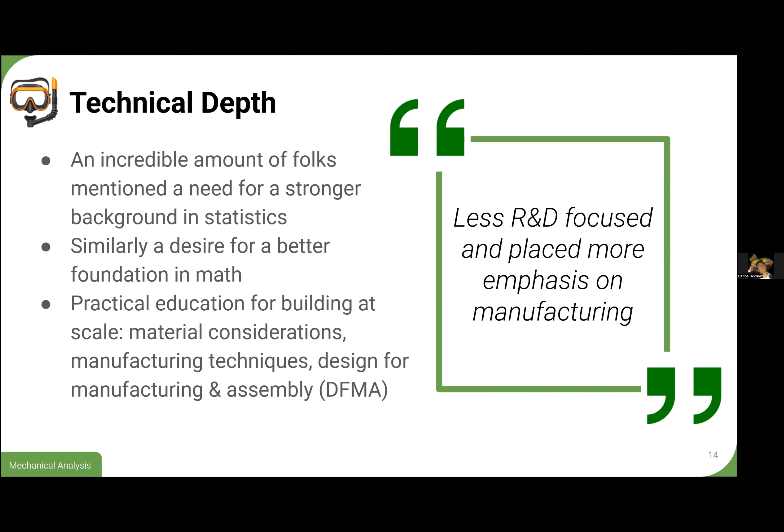Another thing was similarly more practical skills, specifically for mechanical engineering. So people time and time again were talking about the need for understanding how to make things at scale. How do we make something in the thousands to the 10,000s and so on? And how do I actually take my part and understand it when it comes to all the different manufacturing techniques?

A lot of people talking about how 3D printing maybe isn't representative of the real world when it comes to rapid prototyping, and that I need to understand how to work with sheet metal instead and other aspects that aren't really covered when I'm doing something like PIE.

And also it's interesting to hear a lot of people want to see some more stuff on the business side, that they felt wasn't really understood or covered. Or how do I even price this thing? How do I even make something that is feasible where I'm making my tens of thousands, but actually making some amount of profit to pay whoever I'm working for or pay my workers.

And also, which was surprising to me, I guess, was just education on skills in the workplace. Specifically, a lot of people touched on the need for, how do I negotiate a salary? How do I do workplace interactions? There seemed to be a desire for that in the classroom. I don't know if that's possible, but I think it's definitely interesting to see that is an aspect that I wasn't even considering myself.

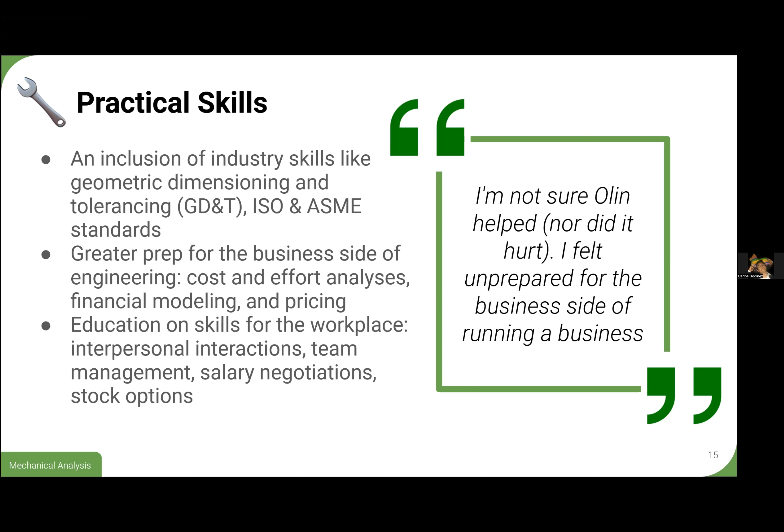One positive note is it was really interesting to see what people noted as Olin's edge, what did it provide them and prep them for that they felt put them a leg up above their coworkers. I think notably, people really touched on the idea of design courses being strong at Olin, design thinking, systems thinking. The idea that UOCD and SCOPE really served them was something that I saw over and over again.

UOCD, I think, was pretty consistent, with a lot of people wanting to keep and maintain it in the curriculum as an essential part of how they thought about their engineering curriculum. And yeah, just the ability to context switch was something that people were noting. The idea that they could do the grindy, how do I get this to work? How do I figure out all the steps to get this to actual production?

But also look at it from a system perspective and think, how does this interact with other aspects of the company, ecologically, psychologically, all the different ways that this goes beyond the scope of just engineering. And that I am not just looking at this very small aspect of what this project is.

And I think in a similar way, people are noting the need for a change in mindset. I think we see that in all the courses that we're now taking, in some of the core ME classes, as we transition to this new curriculum: how do we do something that actually is useful instead of just another piece of plastic that's added to landfills? And how do we increase or maintain that mindset in a learning environment where it's hard to actually provide that impact?

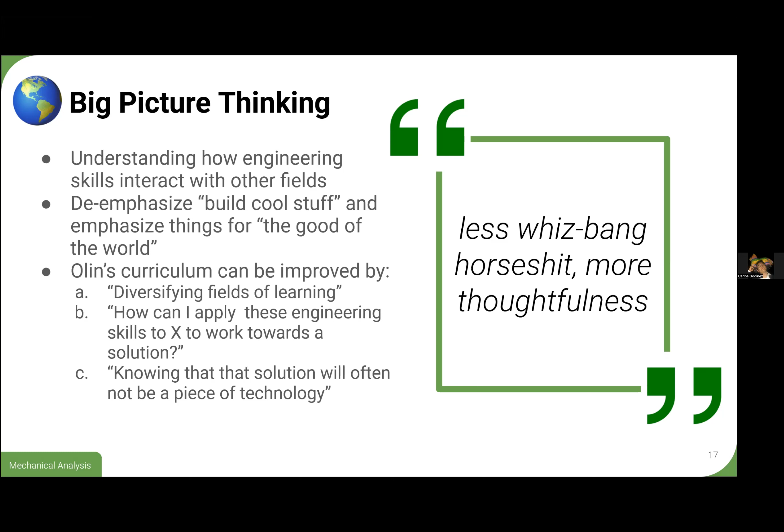I thought this quote of less whiz-bang horseshit, more thoughtfulness, were fantastic. But there are definitely a lot of people that really wish they had a way to consider these contexts and actually think about it when you're being told it, I guess. And this is something we're hoping to touch on in some ways. This is something that Paige has been working really hard on, incorporating safety and ethics, talking with different alumni, industry professionals, like Sarah Hendren. So this is at least one of the facets that we're hoping to approach.

And then the big things are, what is actually good, and what should we do from year to year before we start making a bunch of changes. And I think some of these are self-explanatory, that Olin really does give an emphasis on taking accountability for your own learning and taking charge of that. And we are more of a breadth school when it comes to what you're learning instead of technical depth, and we expose you to a bunch of different topics.

And this course is similar in that way, where there is a wide variety of making tools and topics that are incorporated into machine elements. We're going to give you a quick introduction to each of these topics every class. But it's not going to be the full breadth of it; it's going to give you the verbiage and the things to look up later on, of how you could actually learn this and really use it in your career. But again, it's not necessarily a depth course in some ways.

And these are just a couple quotes that I really enjoyed. I think the first was definitely more intense than some of the other stuff on the survey, but I'll just read it aloud. It's saying, mechanical engineering in the real world isn't 3D printing a plastic doohickey on a MakerBot. It's choosing manufacturing methods, choosing materials, it's doing tolerance stacks, and it's doing drawings. And it seemed like a handful of people really felt that way, that they really wanted to know more about the real world of engineering that we just can't have done, I guess.

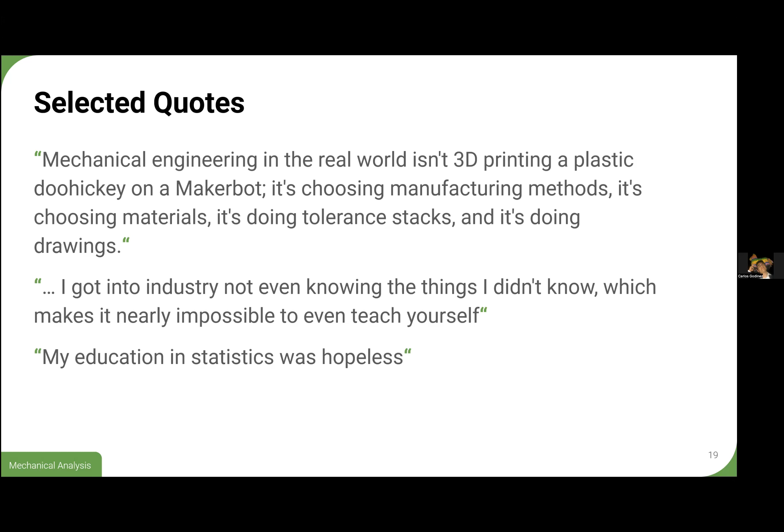And then also this thing was really, really common. I showed this presentation to Zach, and he also vehemently agreed that we have a lot of stats that's missing. So that's something we're also hoping to touch on. We're trying to ingrain some of the stuff that Zach has touched on in PDOs, and he did this workshop this past summer where he taught data science to engineers. So I'm getting a lot of good feedback on how to touch on the topic of statistics in this course. But yeah, this was in the past one.

But largely, I just wanted to let you know that we're trying to look beyond ourselves, beyond our own experiences, to provide a course that actually touches on what people want in their ME career, what people actually feel like they needed that Olin didn't provide. And I didn't want to keep it all in our heads so that you didn't realize the rationale of why we're choosing these things, and so that it's a two-way trust that we are trying to do things that are effective and useful, and that this isn't us being self-serving and just trying to teach a course that's what we would learn. But yeah, that's it.

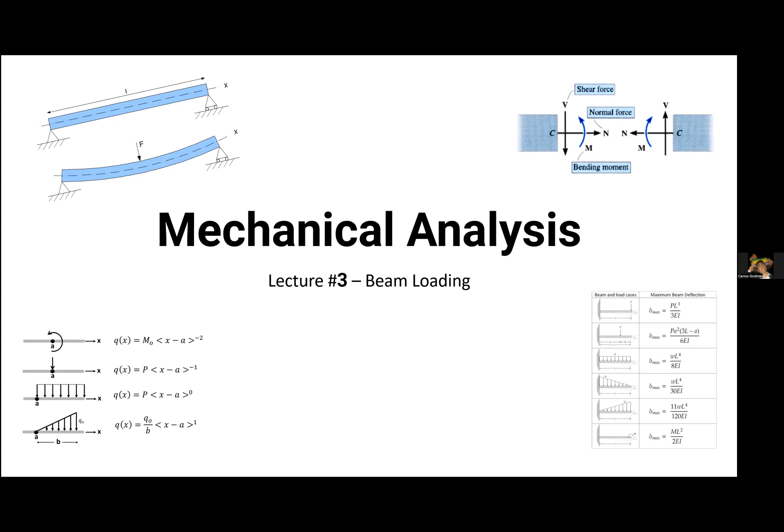What you can do is take the known solutions for those and just superimpose them on top of each other. Say you have a cantilever beam that's uniformly loaded in one direction, and then there's just one random point load or moment somewhere. You can take the solutions of the known cases and then just add them together to get both the stresses and deflections. So it's a pretty useful tool. It has some extent, but I won't really touch on it. It's something useful just to know that you have in your back pocket if you ever need it.

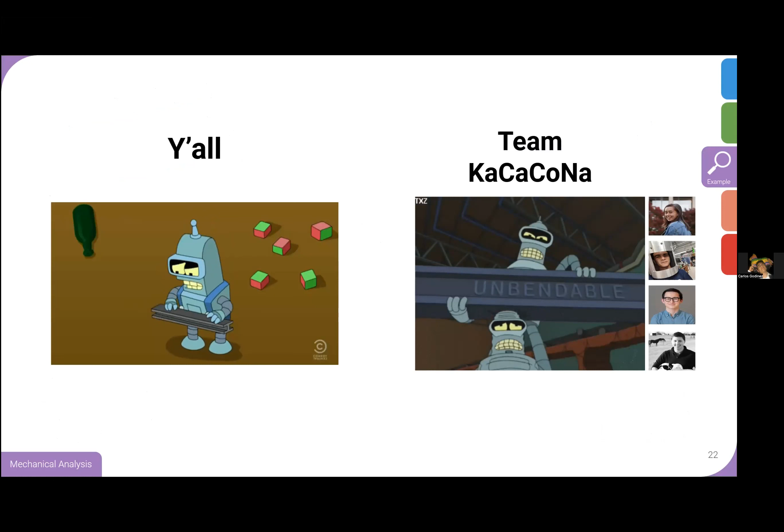So basically beam bending now. KaCaCoNa was the name that Rob and Daniela gave us for the teaching team. We're going to show you our secret beam bending ways.

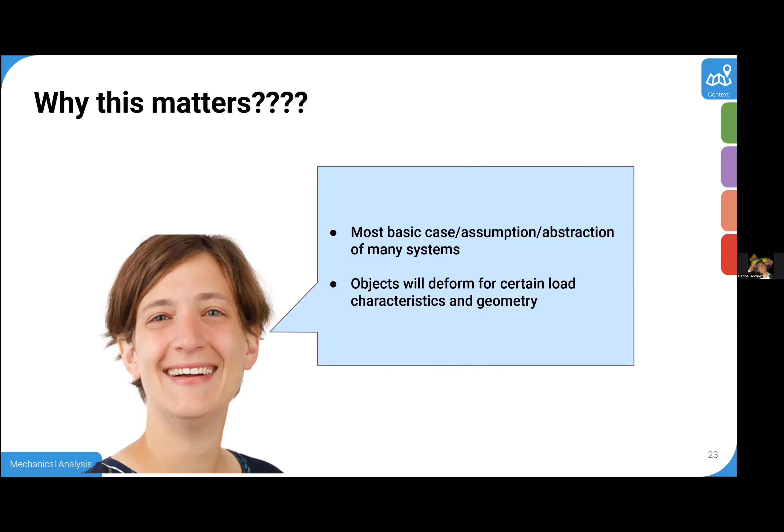Why beam bending matters is that it's really the most basic assumption. If you have a system like some shaft or some I-beam for a known load condition and geometry of a certain object, you can make really good assumptions on how that thing will deflect. All of this is within the realm of small deflection. What is small deflection? Ask Chris Lee. Less than 10%. I didn't know that. Thank you. But yeah.

Like I said, why this matters is that a lot of these engineering problems can be abstracted to just simple beam bending problems. An example we'll see later in the class is that you can treat a tooth on a gear essentially as a cantilever beam with a fixed joint right there. All gears are just spinning levers, and the actual teeth are the beam stemming from it.

Not to get too far ahead of ourselves, but if you remember back to Mech Solids, we'll get to this a little later. Basic beam bending goes MC over I. That goes into a very conservative but very commonly used stress on gear teeth called the Lewis bending equations. And the form factor is very similar.

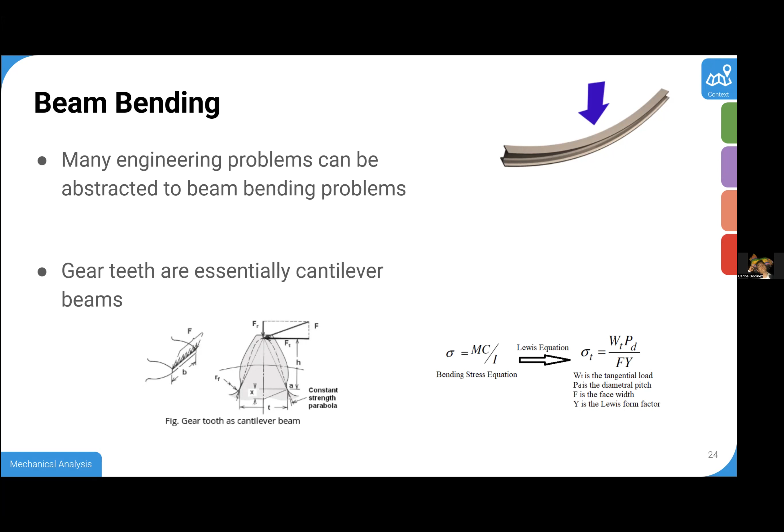Deriving the actual beam bending assumptions and deflections, we're not going to do that in this class. Brian actually has a pretty good video that I do like on it, and so those are in the slides. There are a ton of other resources, including on the content review page and the Notion that was sent to you guys a couple weeks ago. And those of you in Mech Solids, in probably about 4 weeks or something, are going to do these derivations by hand. We're going to skip past that. We're just going to get to: here's the final equation, and here's how to understand how to use it or what it's for.

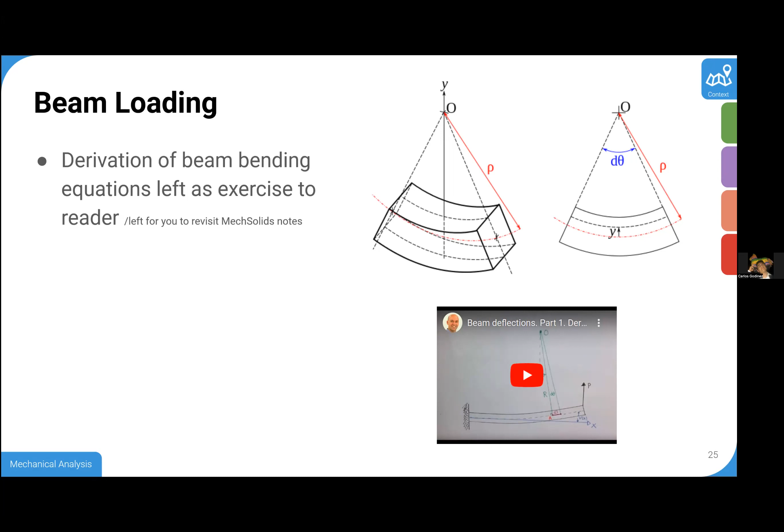Oh, no, don't play that video.

There we go. Okay, so when you have a beam, what we're saying is a beam of constant cross section, and then there's some supports acting on it. When you put loading on that beam, non-uniform loading, it's going to result both in shear and moment. For those not familiar, V is commonly used to denote shear force, and M is commonly used to denote a moment acting upon a beam.

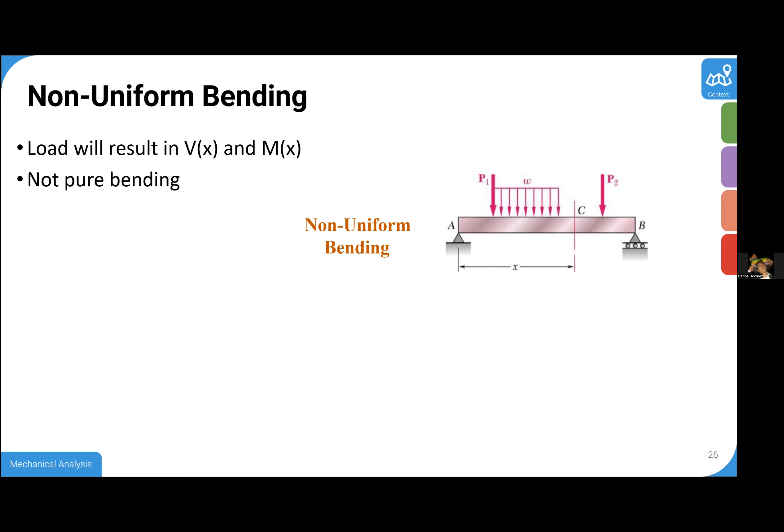When you have non-uniform loading, which is going to be the case almost all the time, the beam itself is not in pure bending. What is pure bending? Pure bending is when you have no shear acting upon your beam and you have just a pure bend of it. So if you look at the top, there is no sliding of things. You can think about shear force as a force on your stress tensor. Shear force is going to cause a change in shape.

Very similar for beams, you can think about it as having axes and grains running along it, and you can see it slide. I don't have it with me, but there are videos online where you take a bunch of strips, hold down both ends and bend it downwards, and you'll see these fibers slide together. So that's the difference between pure bending versus shear.

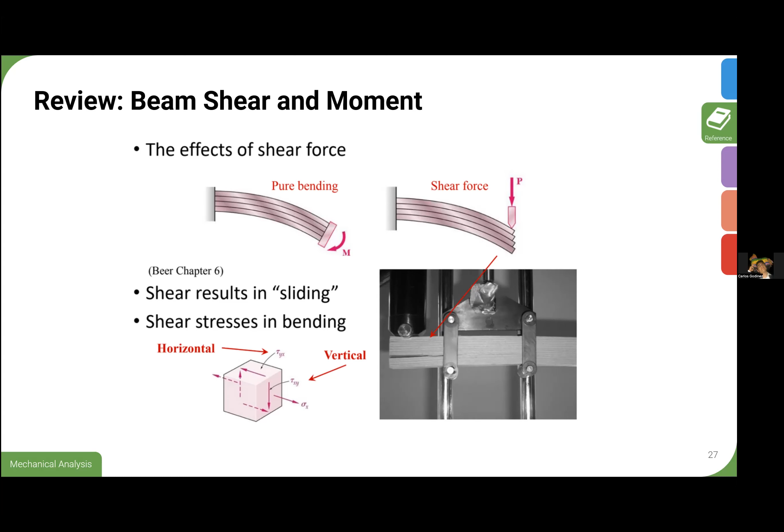However, these equations, even though it's an abstraction, are still very useful. Another way to drive that point home is if you were to look at the actual cross section right here, there should be no change in angle when you have pure bending.

Now is also a good time to talk about bending convention. We'll talk about shear convention in just a second. When you're talking about sign convention for bending, if your beam is bending upwards in your up direction, whatever that might be, that is considered a positive bending moment. If it's bending downwards, like making a frowny face, that's considered a negative bending moment. It's really easy to get tripped up on this, but it just takes some practice.

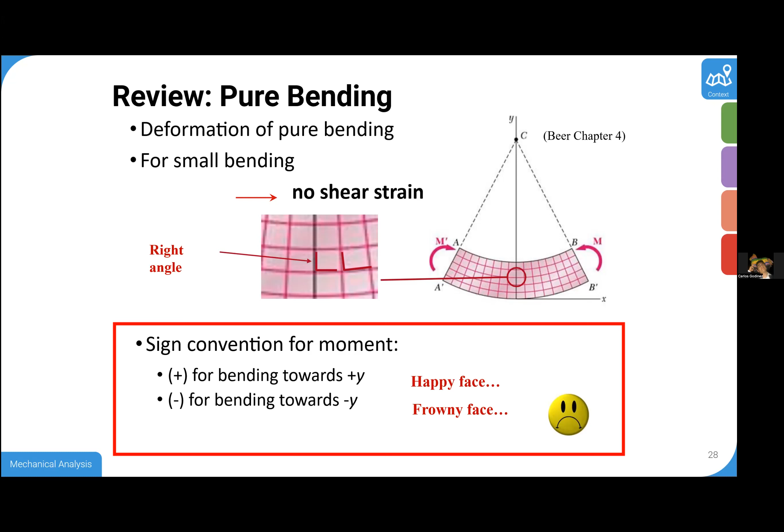I'm going to talk about how you go from shear to moment and loading. The slide's not super clear; I should have put this part right at the top, so focus on this. Right here, the distributed load is usually referred to as W. That's your load, your force applied or your loading distribution. It's flipped in the negative direction.

So it's kind of confusing, but Q of X is your actual loading condition: you have a distributed load, point moments, a point force acting on something. Conventional wisdom says, okay, I have a downward force right here. That's your loading curve. If you go back to the equations and derive where this comes from, small radius, change in curvature, it makes more sense to make Q act in the upward direction, opposite of your loading function.

The reason we have that is because the most classical way to solve beam bending equations with deflection is the double integration method. Basically, your Q function, your loading, is the derivative of your shear, which is then the double derivative of your moment. We have more slides to drive that home. But the biggest thing is to put in your mind that if I take the derivative of my moment, I get my shear. If I take the derivative of my shear, I go back to my loading function.

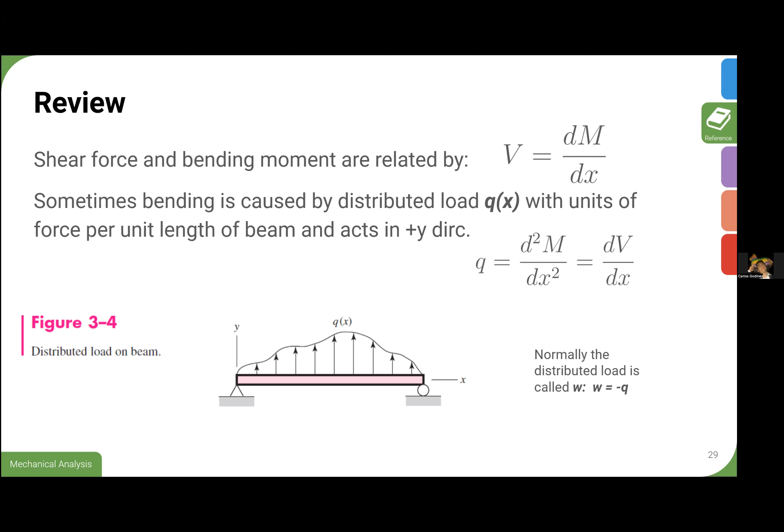When you apply a force on a beam, like I said, it causes both a shearing force and a bending moment. To drive that home, it's better written out right here. The loading function is the double derivative of your moment and the single derivative of your shear force. If you want to put it in the actual calculus terms, it's written out right here, and this is what you'll use for doing double integration methods.

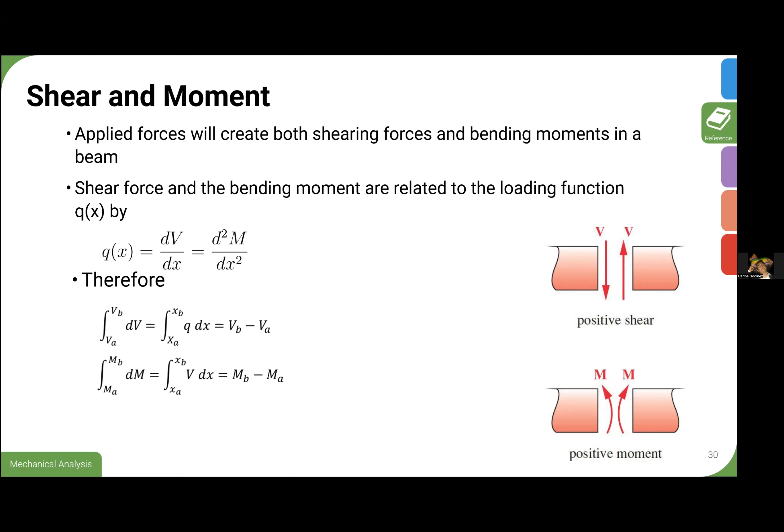We're there now. Let's talk about shear and moment diagrams. I always mix it up. So you remember how, when we talk about internal stresses and force, if I take some body and load it, and then I make an imaginary line and cut through an object, there has to be some sort of internal shear or internal force that holds the object together. You can do the same exact thing with a beam.

So if I have a beam right here with a simple support here and a simple support there, and I want to figure out the shear and the moment throughout this entire beam, there is nothing stopping me from making an imaginary cut at whatever arbitrary place I want, and then asking myself, with my known forces and my reaction forces here, what is both the shear and the moment acting on this imaginary line?

Does anyone have any issues with that? That sounds good? No problems? Cool.

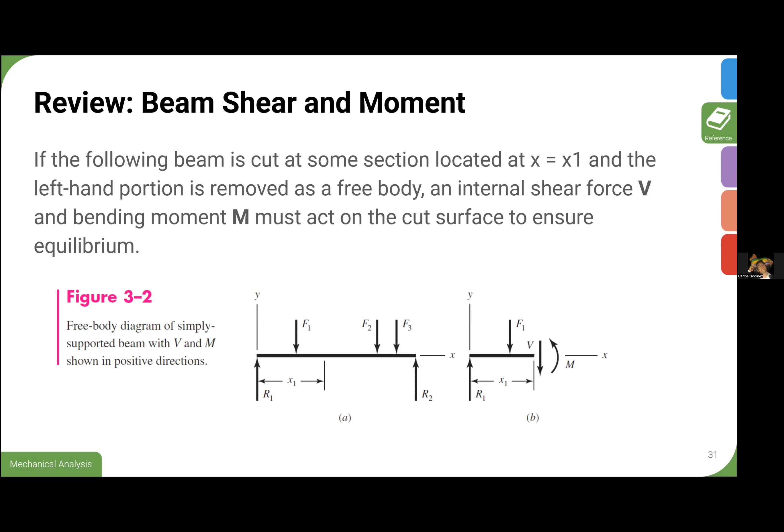Before I start analyzing that, we need to talk about the sign convention for my shear and my bending moments. Like I said, it can be very difficult. It took me a very long time to do this. But the positive and negative bending moment is pretty simple to remember. If it causes a smiley face, it's a positive bending moment. If it causes a frowny face, that's a negative bending moment.

Shear gets a little confusing, especially when you couple it with how we draw both shear and moment acting upon the imaginary cut face. The way I always think about it is, if I am going from left to right, which in most cases you will be, I take my left face, and say this is a fixed end right here. Is my shear force going to be pushing it down or pushing it up? If it's pushing it down, that's trying to force it into that smiley face, so that is a positive shear. Ignore this second half, but in this section right here, even though my arrow is pointing down, that is considered a positive shear force.

Could you explain why the arrows on the diagram are positive here, with the specific reactions? Sorry, what? Okay. So this diagram, the way I like to think about it, and some people find it helpful, is that the shear still causes a reaction moment. And so that is causing it to bend in that positive, smiley face position.

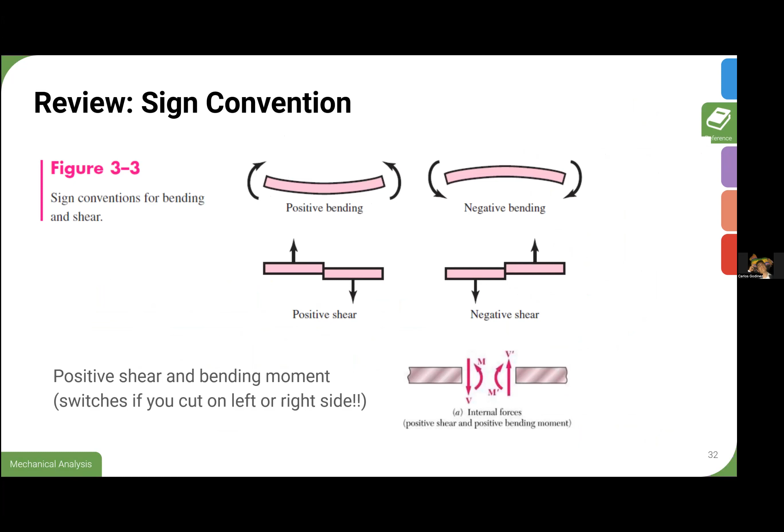When I make my cut on the, oops, don't look. When I make my cut on the left side, so pretend like, ignore this section right here. When I make my cut on the right side, and sometimes it's necessary depending on the beam bending problem that you're doing, you want to flip your arrows, you flip the direction of your cuts.

Can you ever have a positive bending moment, but then sort of a negative shear? Can you ever have the opposite pair? Or can you just determine the direction of the shear just based on the direction of the bending?

I believe you can. If you have, I'd have to think more about that, right? So in the meantime, just assume no, that you should solve for both of them and do your due diligence. But I'm trying to think of a case where you would have opposite shear. And then instead, if you had moments applied on your beam instead of forces, you still have. Yeah. It would be the same. That's good.

Okay, so afterwards, this is what your actual... Carlos. Oh, sorry. Just a question on the previous one. What information does the second diagram give you as compared to the first, and the fourth as compared to the third?

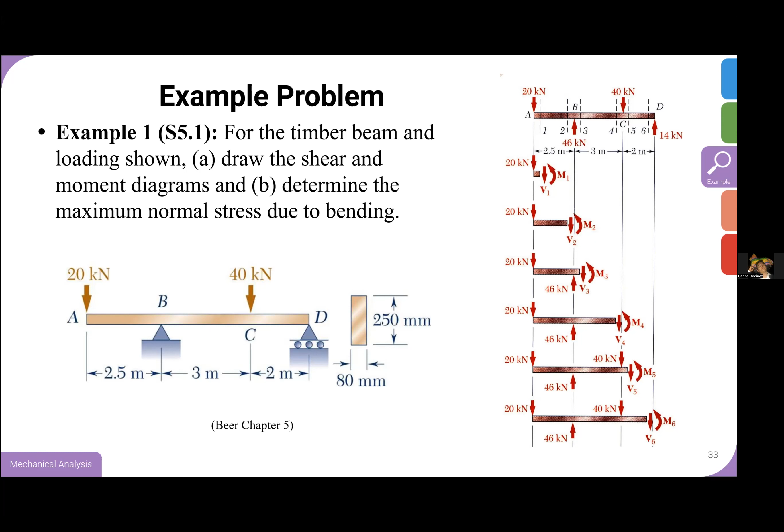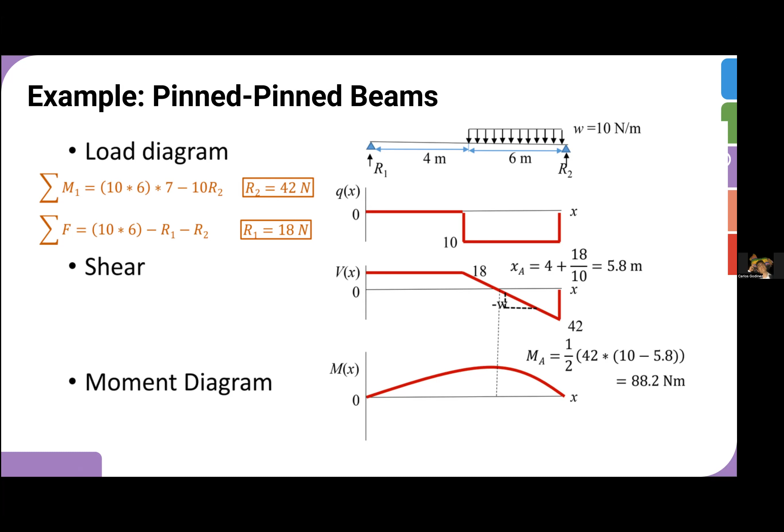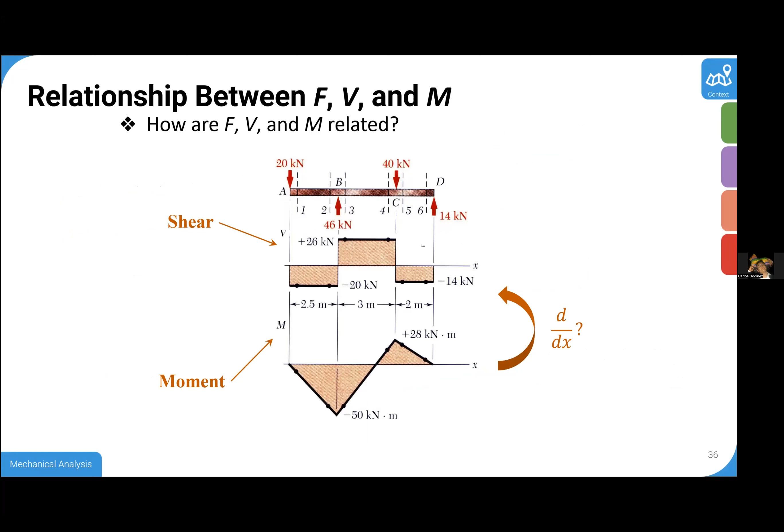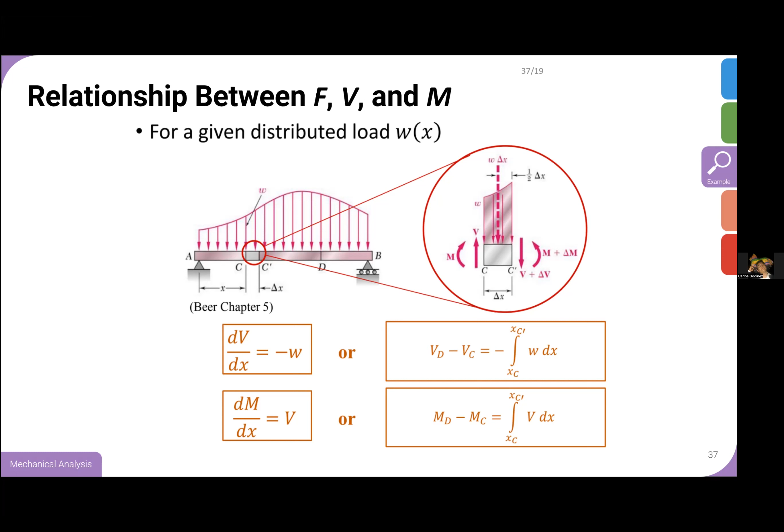Okay. Once again, just driving that point home where it is the derivative of that, and actually go back one, this is the derivative of that. Same thing, double integration method to get between shear and moment. Here, I wanted to have y'all go through the in-class example and spend a few minutes making your own shear moment diagram.

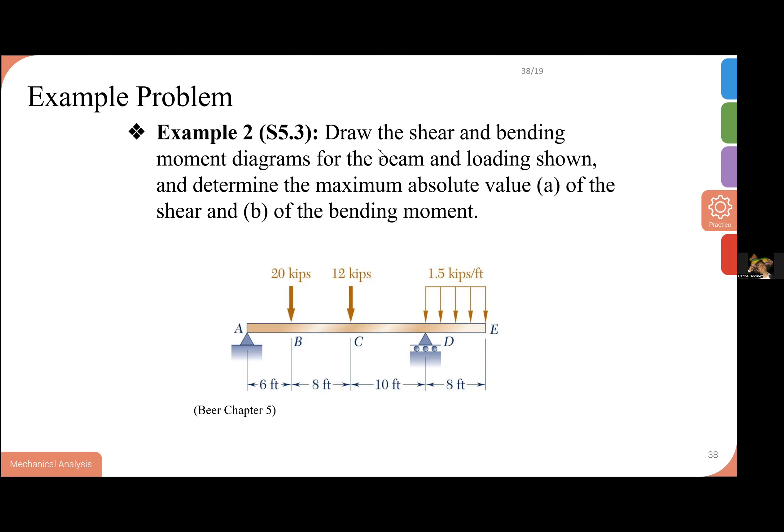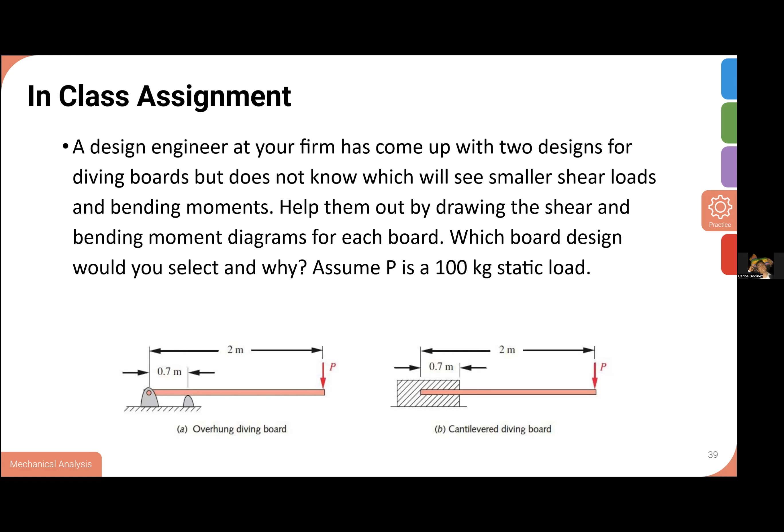Okay, so let's actually think about this, because you have kind of two approximations to it. So for this first one here, because we don't have a fixed end for this 0.7 meters right here, we're going to experience some shear stresses acting in the middle. So this doesn't look too bad. We haven't done the actual forces. I just assumed like a 100 kilogram force acting upon here. And this is what the shear moment diagram would look like for a case like this.

Interestingly enough, for the fixed end that we have here, it actually is going to result in less force. The reason for that is that for this fixed end right here, the moment isn't going to be applied until the very end here. And so that is actually going to lead to less stress and less forces acting across the beam, because you're effectively eliminating this first section right here. There's no forces acting across it, and the moment only acts until you're right here. So just something to keep in your mind when you're trying to build intuition for what beam arrangement is going to have more forces inside it.

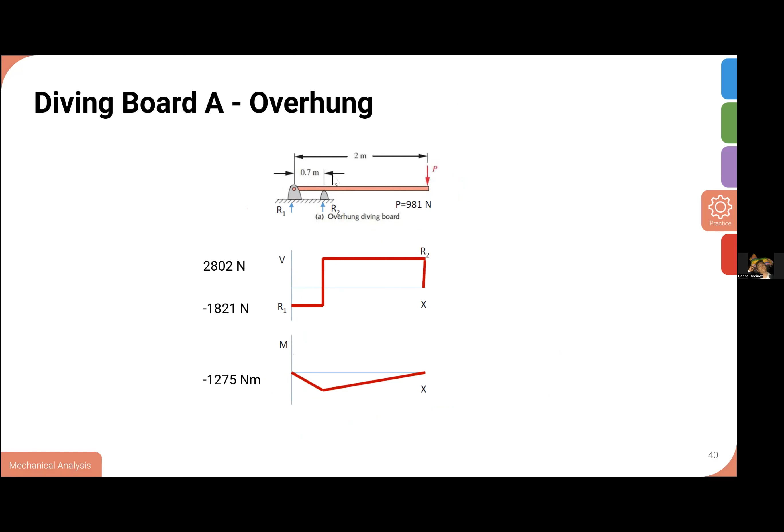Last final slides. This is, yes, sorry, has a higher shear, yeah, value. Yeah, so the actual shear, if we do the math for this, the shear acting across this section right here is, number one, you're going to have a really high negative shear here, and then you're going to have a higher shear in this section. You can flip back and forth in the notes to see it, but right here we have a fixed end, and so we just have a fixed moment right there.

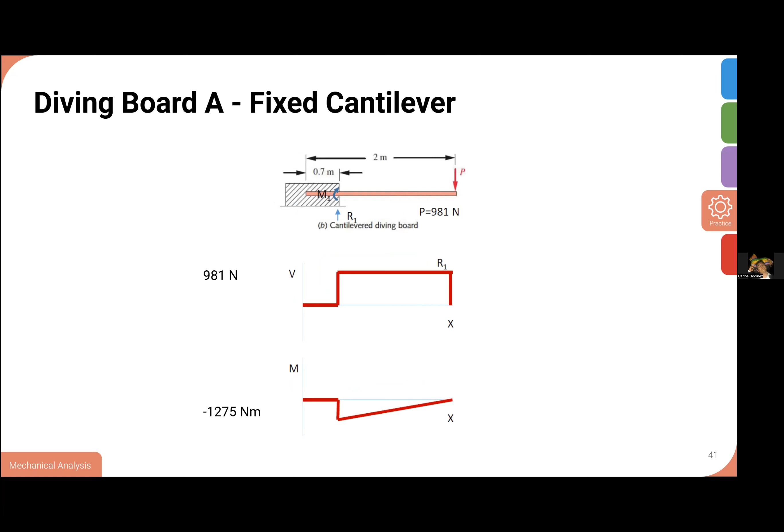And another way to think about it is that this arrangement can't provide a moment, it has to provide a force couple. Versus this arrangement, it can provide a moment because it's a fixed end. So it makes it more simple to actually just do the free body diagram. Okay, this is speed running through what is usually a 30-minute lecture in mechanics of solids. So you don't have to believe me. It's probably useful if you believe me.

But when you actually start caring about the stresses and the bending stress acting across a beam, and you're considering the geometry, basically you have two moments. The moment acting across the beam is going to be equivalent to your Young's modulus E of whatever material it is, multiplied by I, we'll get to I in just a second, divided by your radius of curvature. Which way is it? Yeah, radius of curvature. The radius of curvature, if you go through the Brian Story video, or remember back in your mechanics of solids notes, or you'll experience it in just a few weeks.

Basically, if you have a bending beam, for every point on that, you can draw a dot and see what the radius is, like if you imagine your beam was now a full complete circle. When you do a bunch of calculus and make some approximations, the bending stress dependent on the normal forces acting in the direction of the beam, you can approximate as the moment at whatever point you are along your beam, multiplied by y, which is the distance from your neutral axis, divided by I. And I is your second moment of inertia.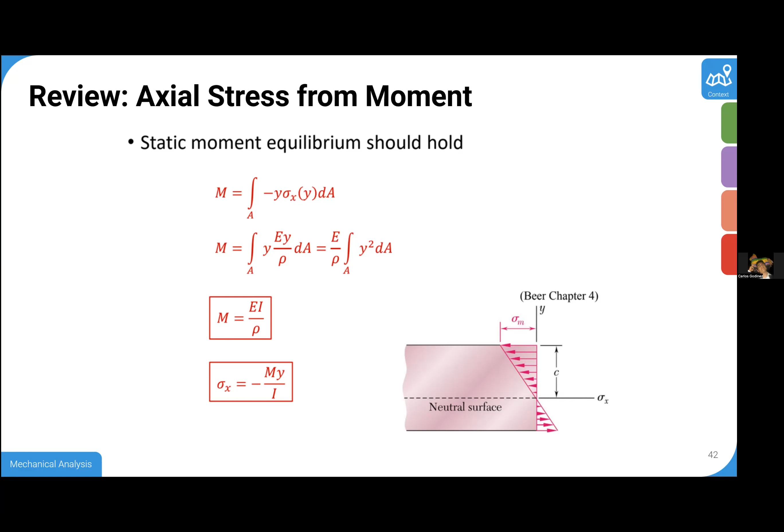If you're going to remember one formula for beam bending, this is the formula to remember. This is your most basic approximation, and it'll get you close enough for whatever you're trying to do, and then you can verify your results through FEA or something like that. What is I? I is your second moment of inertia. So for people who haven't taken mechanics of solids, if I have a piece of paper and I hold it completely flat right here, it's going to droop. It's not very stiff.

However, if I add a little bit more mass in the y direction against where it's trying to bend, it suddenly becomes a lot stiffer. Similarly, if you imagine a 2x4, if I put it down on a flat like this, it's gonna droop if I walk across it. But if I go vertically, it's gonna be much stiffer because there is more area above that neutral axis. The neutral axis is this y value right here.

It's the dead line center of your beam. And that's where we measure how your stress is acting. So that My over I, that y is the distance away from the central axis. Sometimes you'll see it as Mc. C is sometimes the distance across. And I is the sum total of all the area above that central axis.

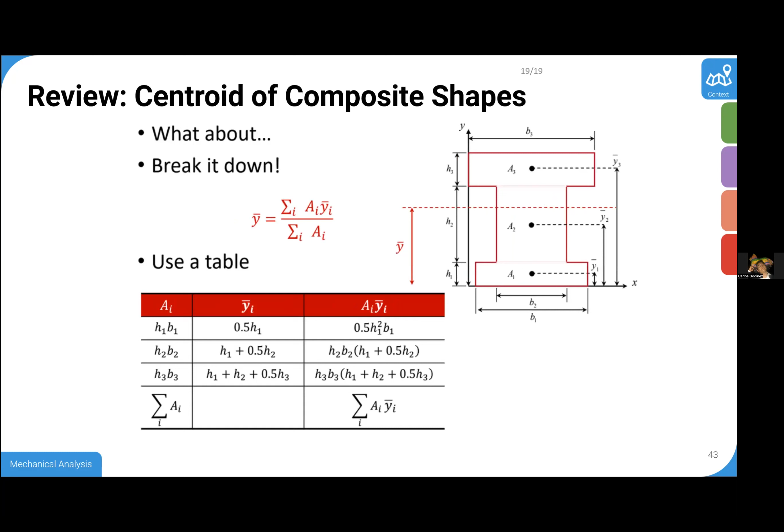Yeah, like I said, I'm speed running through this.

When you have non-uniform shapes or something that you don't have a table for, you're going to use parallel axis theorem. I don't know if you guys remember that from high school physics, but basically if you have some unknown shape, you're going to take the initial second moment of inertia that you calculate, plus whatever distance away that is squared, multiplied by the area of the shape. So for example,

What I could do is take the I, second moment of inertia, for whatever this hump is. I can add it to the area of that hump times whatever this distance is squared, and then for the total, I would add that to the I of the I-beam. Yeah. Or you said it was distance from the neutral axis of the I-beam? Yes. Yeah. So here, let's pull that up.

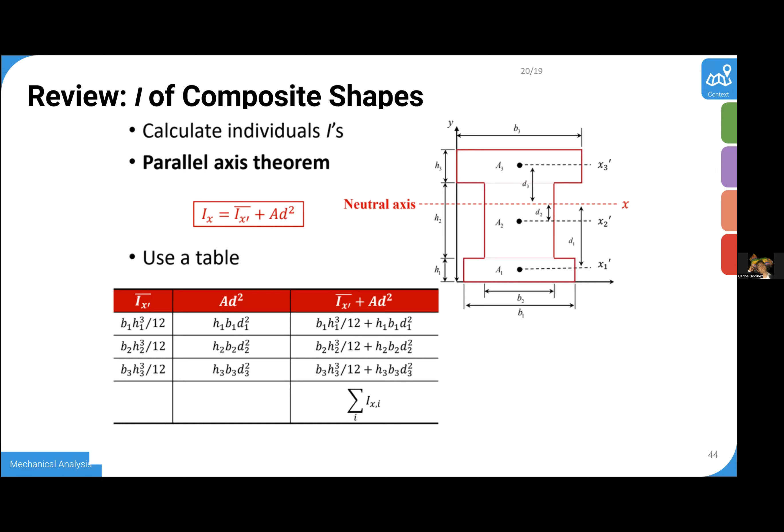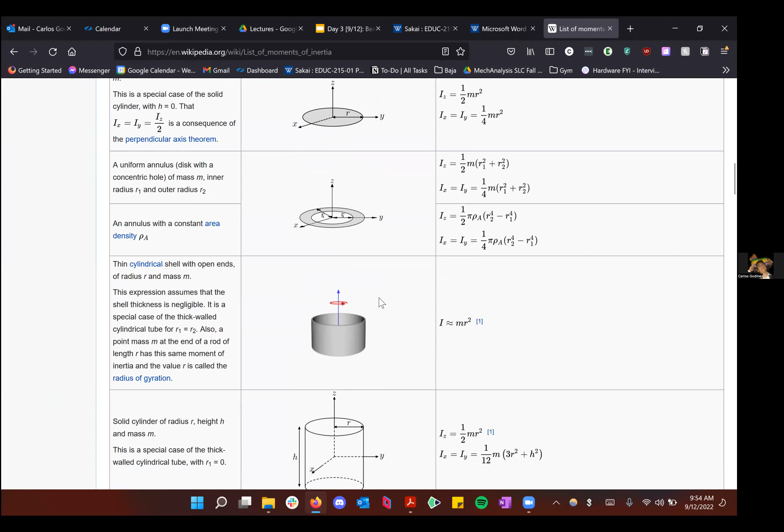There's so many resources that you can use for this. Honestly, Wikipedia is one of my favorite ones, where if I scroll down here, yeah, area moment of inertia is also common. If you want to look into the actual calculus for where this comes from, there's a great video by Efficient Engineer about it. But basically, if you're bending about a certain axis here and you have a known cross section, a lot of these values are already calculated.

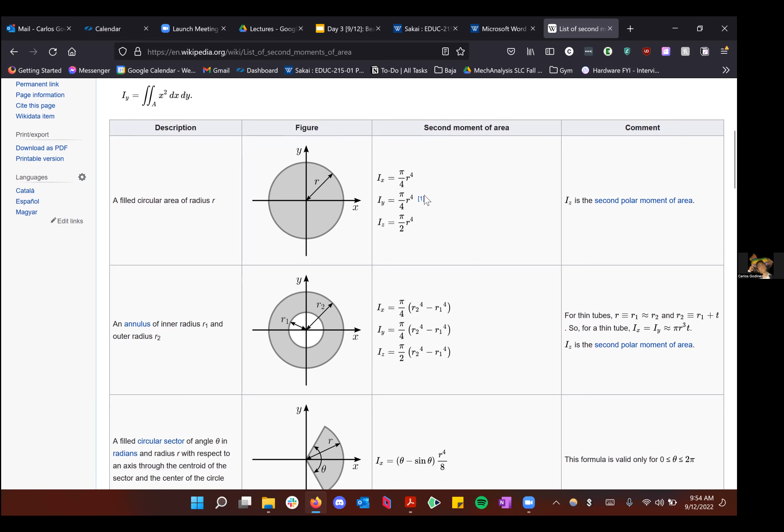And so if you wanted to do a composite shape, that's where parallel axis theorem comes in. You take the I of whatever your weird additional shape is. So if this imaginary hump was up here, I would take the I for that shape and then add the distance from the neutral axis squared multiplied by the area of whatever my weird hump is.

That is most of what I have for lecture today. I know we speed ran through a lot, especially if you're co-enrolled in mechanics of solids. If you want to spend a little bit more time talking about this, I'm totally game for that.

In the meantime, homework 2 should be posted and should be due a week from today. It's been a few weeks, but there should be one shear moment diagram that you have to make, one beam bending equation that you solve using superposition, and one equation you solve using singularity functions. Those last two we're going to cover in class on Thursday, but it's not super difficult and it shouldn't take a lot of time. Yeah, absolutely.

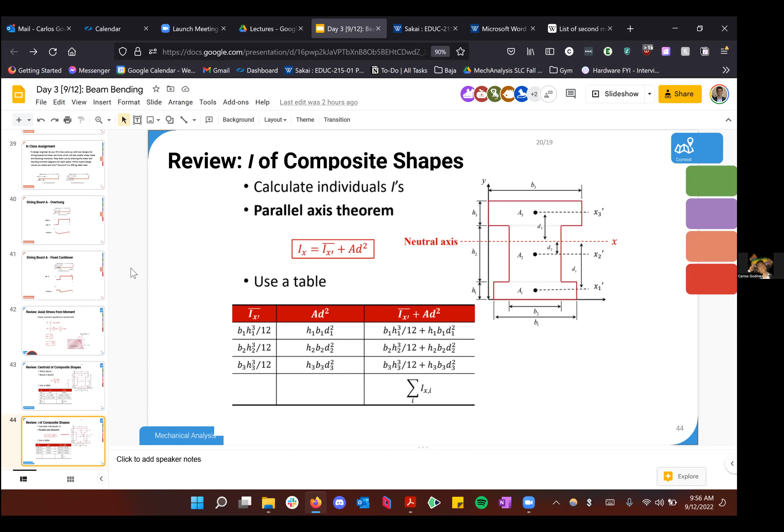Absolutely. One other thing that's due next Monday is the first check-in for your final project, which is basically just spend like half an hour researching different ways of storing your reference resource thing. There's some more details on the calendar, and there's a sign up in Sakai, so just walk through Sakai for that, and we can talk about that more. And if anybody has any questions, just reach out to us and we can chat out different ideas.

It should. Okay, it's not posted yet. I will. Can y'all not see this?